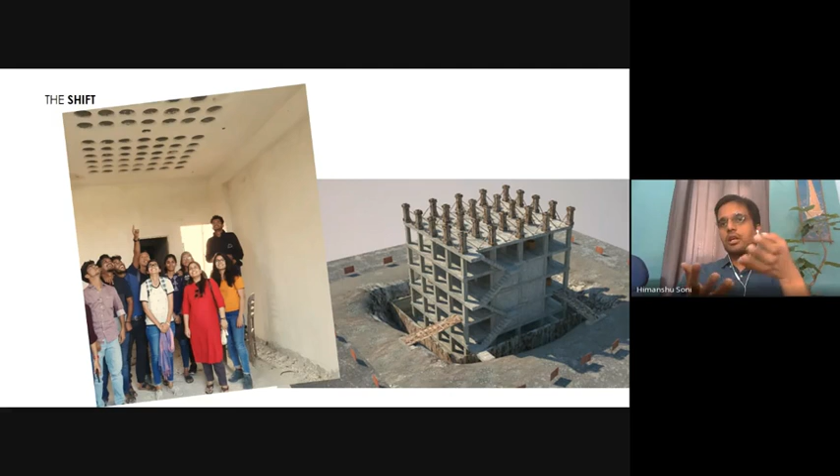From site visits, taking students to the site, now the faculty might have to shift to creating videos of the site, or use multimedia tools or virtual models of the sites. The exact construction, how it is happening, can be done in virtual reality and presented to the students so they have an almost near to real experience. Obviously we cannot replace the experiential learning part, but at least we could say they are industry ready, and when they go to the site, they are not in a situation of shock or awe, where what they are seeing and what they have learned is a completely different thing.

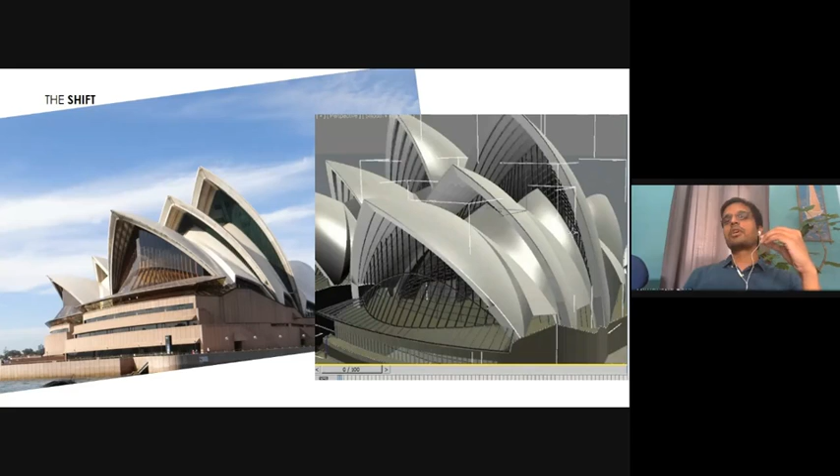Visiting your local or international iconic buildings can now be experienced through various tools, like using Google Maps to virtually do street tours. Similarly, there are various 3D modeling softwares that have created exact replicas of models, and you can see each and every minute detail of these masterpieces to understand how they were created and what would have gone into the construction phases. So there are lots of resources now being created and delivered for pedagogical purposes, but for this we need to understand the tools very well.

Most of the time, only 10% or 5% of the students or trainees we interact with are good, but 90%, 85% of them have a very superficial knowledge of the concerned technology they are working on, because of the short attention span they are fighting with, and lots of information coming to them. So we really need to upgrade ourselves to upgrade them also. We cannot take for granted that we deliver the knowledge and the technology will be taken care of by the students themselves. Both things have to happen in parallel.

Another thing that comes up in my interactions with colleagues, and most people while I was at CEPT, or even now, is that imagination and virtual reality are seen as against each other, like black and white statements—either they are against each other because virtual reality will eventually kill the imagination power of an individual, or, as someone pointed out, basic concepts are very important to understand, which is rightly what I'm trying to tell. The second part is we believe that if you don't use your faculty of imagination, eventually it will go off. But there is a lot of gray area.

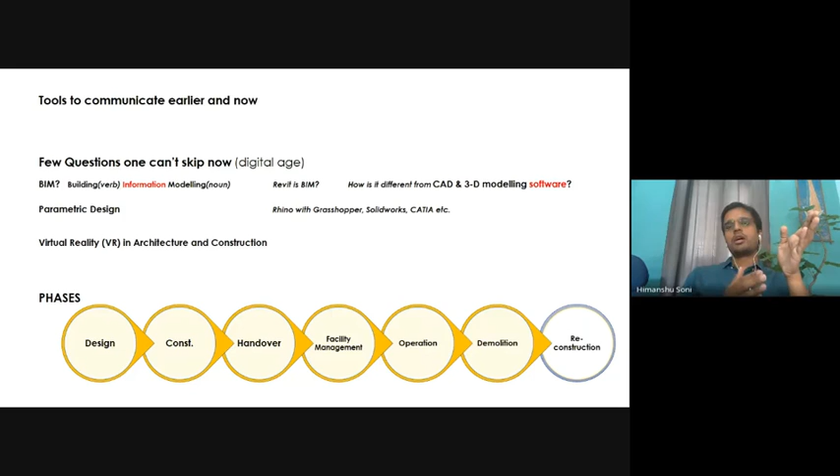If you look into the past, we were majorly concerned about design and construction phases of the building, and we would take feedback over a period of time. But now with larger scale projects, and when we have technologies like BIM, we can do this complete building phasing, and you can have control over it as a project manager.

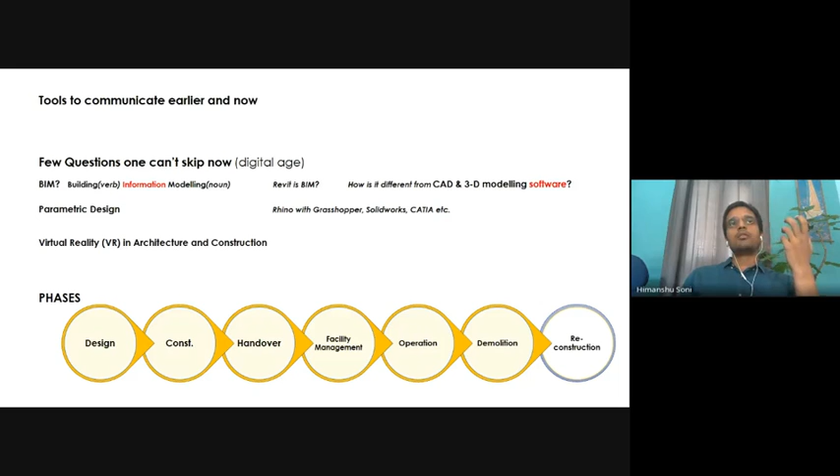So you can talk about design, you can have construction, then when you hand over, you have certain manuals - what are the various drawings, where are the shaft locations, what maintenance practices you have to follow later. And the operations part, how you can take care of it from demolition to again if you have to reconstruct the building. So this is the kind of information which is now being created, used, and transformed.

I think I'll go to the next slide now. So another thing - I attended Sanjay Prakash sir's session for a very short while, and I think he also mentioned this. Mostly we have to stop thinking of architects, while making our students architects, and also as practicing architects, we have to stop considering ourselves as the captain of the ship anymore. There are lots of stakeholders, and they need to be brought together, given a proper place in the whole practice.

We need to collaborate to create these information models we are talking about, so that you can have fewer surprises when the work goes onto the site. There are fewer errors, and the cost that goes into creating these things is eventually recovered, because you save a lot of cost from recurring expenses caused by errors done at site.

So this term is basically called your pre-construction management. You create almost everything in a model virtually as if it is going to get constructed step by step in a phased manner. This reduces the need of physical meetings on site, resolves issues, and makes the process smooth and efficient.

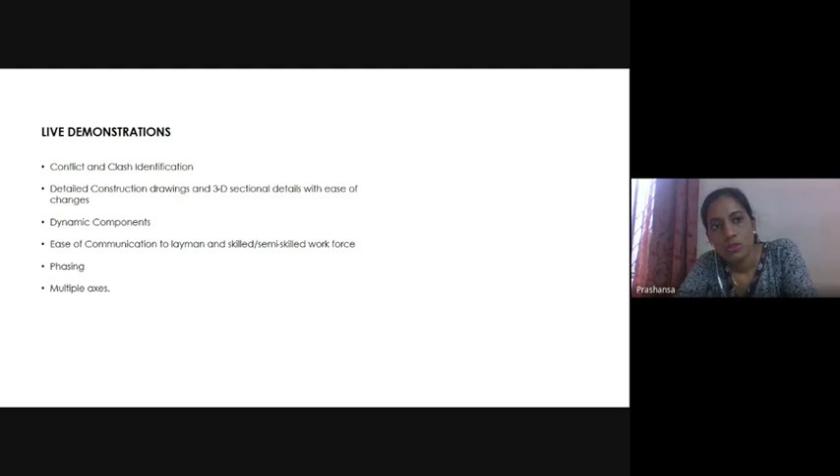No, that's it. So we are now moving towards the live demonstration by Himanshu. Himanshu, are we ready? Yeah, we are ready, I think now I will have to start.

What we are going into for the live demonstration, as Prashansa rightly pointed out, we're going to talk about just one tool. I would always say you have to fall in love with technology to understand it deeply and use it. Somebody was asking if it makes the whole process cumbersome to go forth with your imagination and create a 3D model. When you actually fall in love with technology and start using tools with perfection, it becomes like your hand - you're using your hand, in a similar manner.

So I have picked up a tool for you guys to experiment with, which can help you in your pedagogic ventures: SketchUp. Why I have picked it up is because a first year student can also understand it, work it, access it. It is a very easy tool on its first impression. My 10-year-old nephew also uses SketchUp to create a pool, or whatever is his imagination. So it's that easy a tool on the face of it.

But it is a very complex tool when you start getting into it to express things. You can take out your quantities also, as Prashansa was telling, there are BIM features also coming. Initially it was with Google, then it came to Trimble, and now Trimble is trying to make it into a complete BIM platform, parallelly, along with the ease of its functioning. SketchUp is much more user friendly - it's much easier to pick up than Revit, which has a lot of demands from the hardware part, like you need a lot of RAM in your PCs and all.

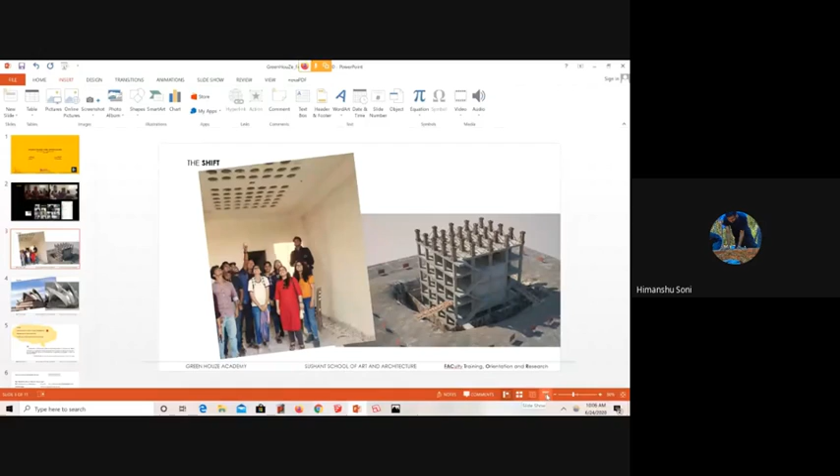Okay, so this is the live demonstration in which we are going to talk about conflict and clash identification. That's a bit complicated, so I'll keep it for the last if time permits. We'll also look into detailed construction drawings and 3D sectional details which can be created and easily changed in SketchUp.

SketchUp, which is generally considered a very basic tool, has got a very advanced level of understanding, and I think there have been a few things shared in the previous presentation also. There are dynamic components which can be interacted with. So these are the list of things, I'll go one by one.

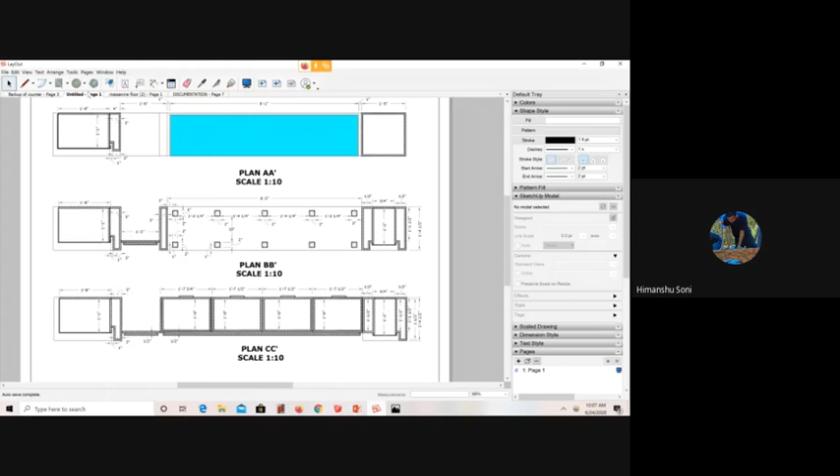Let's say I'll go further for construction purposes. Let's say you are talking about a door detail. This is the kind of detail which we can use. This is always connected to your model. So let's say this is your door. I will go to SketchUp now.

So I will start with the live practice also. First, I will demonstrate a few things. Let's say this is your door, and I have to change something in this. Let's say I delete these handles in it.

So what happens in your layout? I have to save it also. The moment you change something in your model, you save it, go to your layout tab back again, and update the model. Right click.

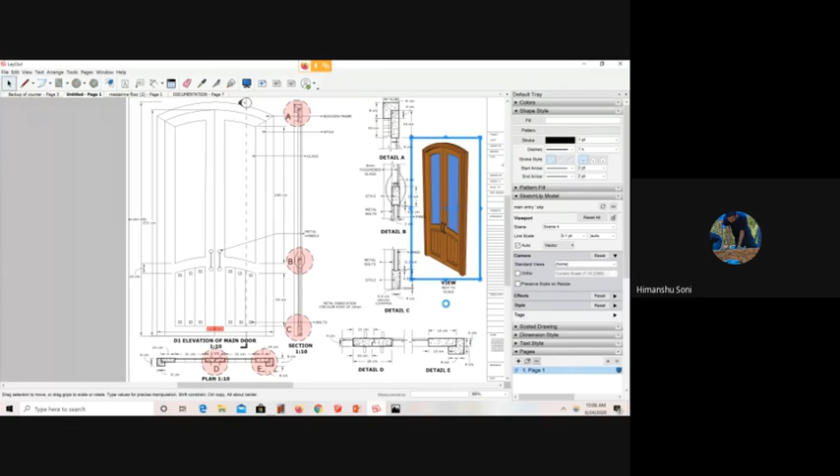Okay, so you have to update the model reference from here. Right clicking it, update the model reference. And the moment you do it, you see things change everywhere.

So it will take some time. See, once your handles are gone, it is gone from here, and there is a red mark which is created, which says that there is something marked in the drawing which is not there. There was a handle over here also which is removed. In the plan also, in the front areas, there was a handle which is automatically removed. So you work actually in 3D, and your 2D stuff, which you have created with the knowledge that is being delivered to your students, gets updated automatically.

So a lot of recurring or a lot of checking is actually reduced. You do it at one place, and if you have certain labeling which is there, that is highlighted in red, and you can rectify it along with it. So this is the kind of thing which you can get.

So I think I'll close this. Other details which I want to show you are possible. This is the kind of staircase detail also which can be created. So you do modeling on SketchUp, bring it to layout with various views, and you can combine and do the level of detailing.

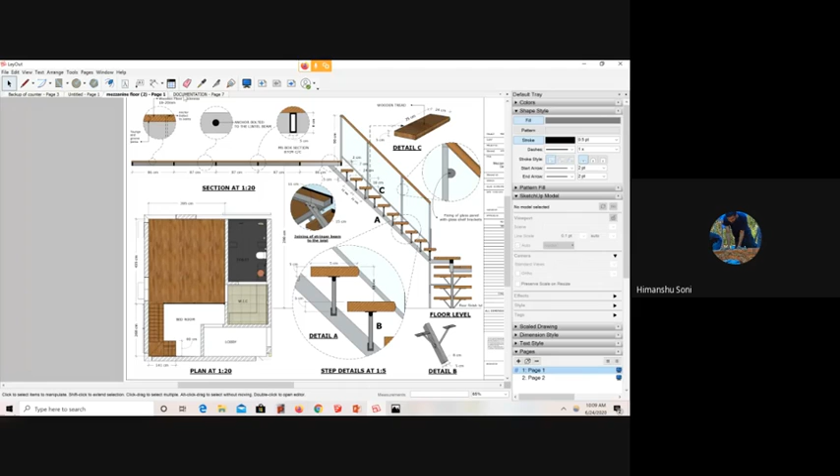So the basic conception of SketchUp being a very basic tool can be broken by seeing these images, or you can also do these kinds of drawings. This is also, I'll just bring it a bit up. So this is the kind of drawings which you can produce out of SketchUp. The level of detail is almost similar to what you do through your hand drawings or through your AutoCAD drawings.

So there are lots of... see, this is the kind of... you can create exploded views also out of it.

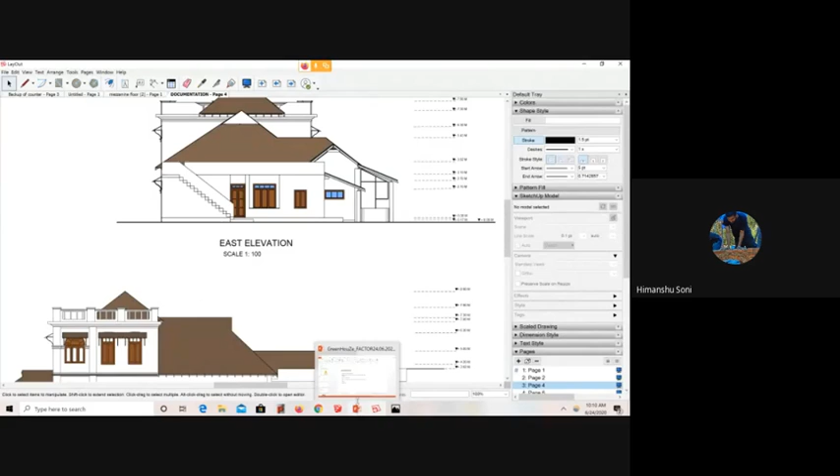These are the kind of sectional drawings you can create, along with elevation. I think that's sufficient for the level of drawings we can achieve. I'm just trying to make you fall in love with the software a bit, so that when you start practicing, you actually see the meaning in it.

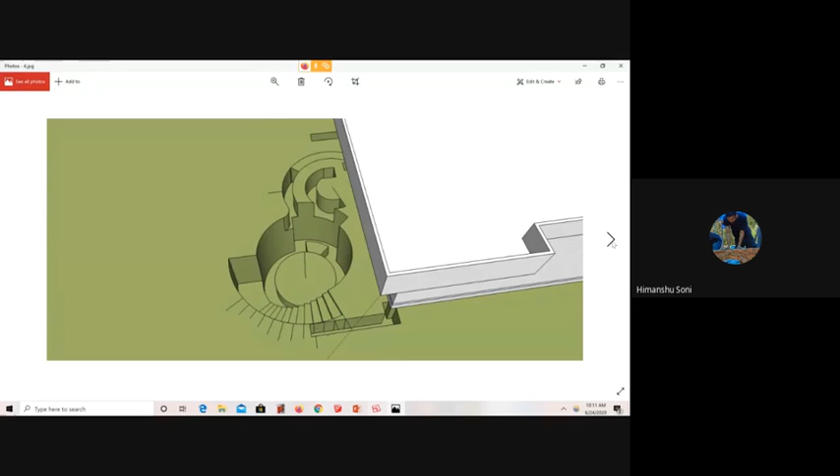Another thing you can do is various phasing in construction. I'll show you one of our projects in Udaipur, which was mud and stone construction, a multi-level project. We needed to pass on information to the site, so we created various phasing of it - showing how the foundation has to be dug, how the staircase has to be taken out, and what are the other levels. This was very difficult for me to communicate because there were so many levels to the semi-skilled people working on site, and this really helped - they could carry it on their mobile and refer to it more and more.

There were dimensional drawings provided along with these things. You can take them to the layout tab and create dimensional drawings out of it, and create various phases - like the stone foundation, then the PCC which is being done, then the stone foundation coming up, cement oxide flooring coming, stone walls coming up, CSEB blocks coming up. This is the kind of help you can generate out of SketchUp to explain to your students, or also for communicating.

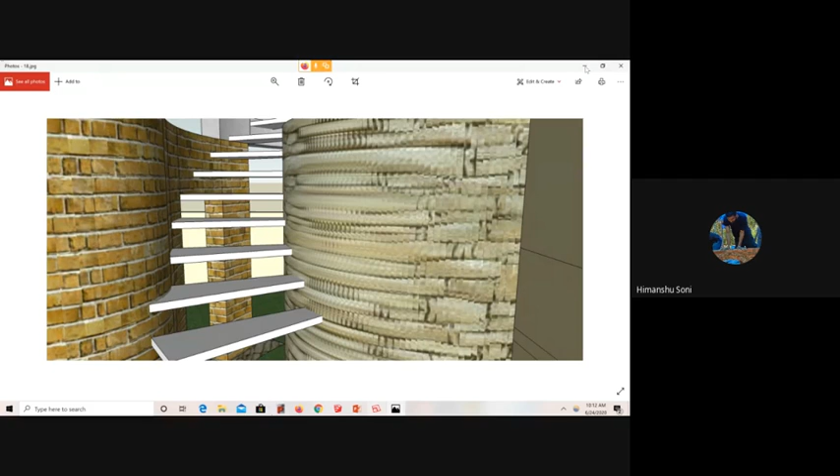Basically, how powerful a tool is in communicating something becomes important. I have got another model which helps you to dynamically tell - this is the final model. This was created by John.

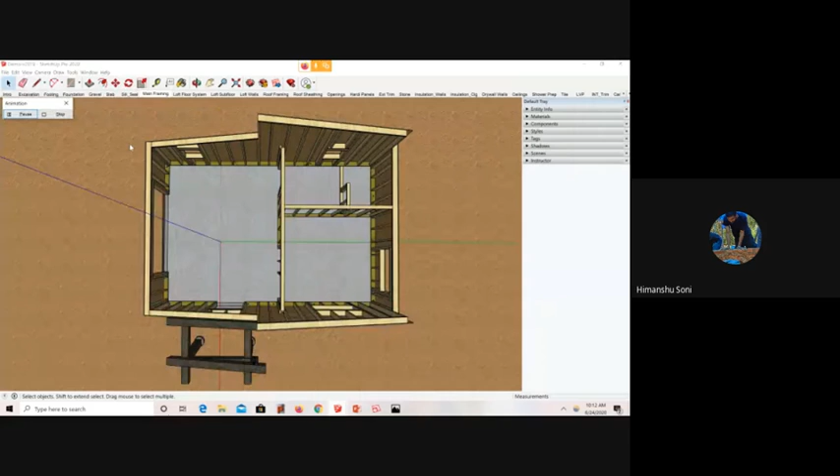If you look into, I have various tabs on top. SketchUp has a tool called Scenes, which you keep adding to create animation - from excavation to footing to foundation, and these can all be attached to attributes to get quantities out of it. So there's gravel, then you put a slab on it. I can also run an animation of it - let's say I go and play animation, so you slowly see how things are building up on site. This could help the client understand how things would happen, and also help you communicate to the construction team. The communication becomes very clear, and the chances of error start reducing.

So your stone cladding comes to the bottom, and then your inner insulation boards start happening - this is a wooden construction. Then the toilet fixtures. These are the kind of phasing you can do.

Himanshu, what is this phasing tool? What are the commands? Yeah, I'll tell you that - I'm just showing the power of the whole platform. This is the Scenes tool, which is used to create these kinds of phasing.

You switch on and switch off layers, and try to control what is visible and what is not. To create this, you create a model, then put it into various layers as you do in AutoCAD, and then switch from one scene to another to create these kinds of animation. I'll demonstrate that also.

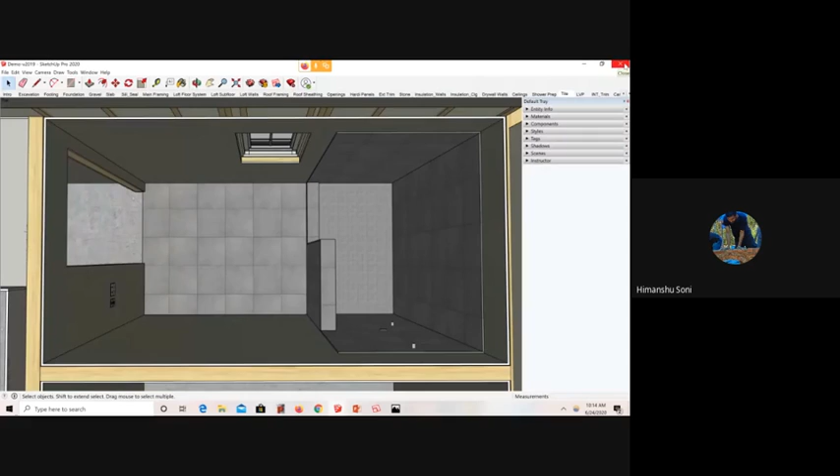Okay, I'll just make the whole system a bit lighter. Now we move on, as we were having discussion with Prasansa, so we'll start with understanding the whole SketchUp tool. This would be helpful for beginners, as well as for people who are already using SketchUp. I use SketchUp very intuitively - I see the toolbox and I start using it.

First of all, I'd like all you guys to open up SketchUp and do one small thing. You'll see a toolbar on top of your window. Go to View, and in the view go to Toolbars. In the toolbar, click on the large tool set, uncheck getting started, and close it. You'll get this toolbar onto your left panel. Keep the default tray also open - there you have entity info, materials, and a lot of things which you need to use while you work. I hope everybody is with me.

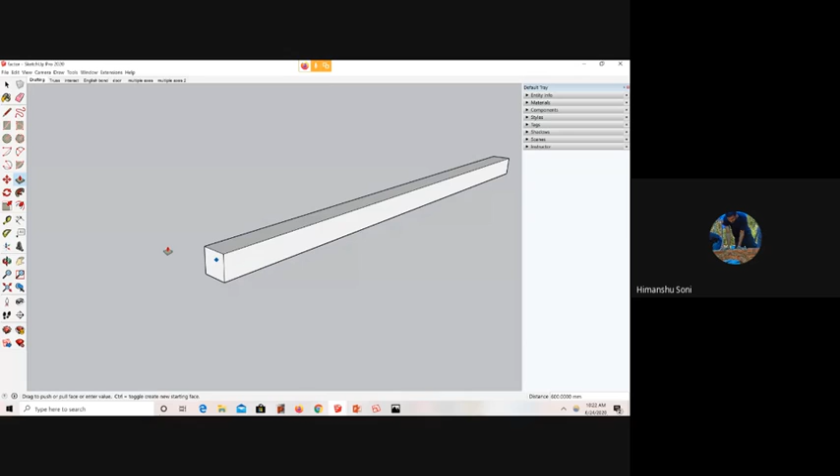So let's say I created this, and now I want to rotate it to 45 degrees. For rotating, you can use the same arrow keys, rotating it along the green axis.

So you lock it along the green axis, keep it, and give it a dimension of 45 degrees. So this happens. Now there is another tool of SketchUp which is very helpful.

That tool is creating components and groups. So what is the difference between components and groups? Group we always use in PPT also to group things. So there are a lot of surfaces in this. If you select, you will select one surface, you can select another surface. So SketchUp as a tool works on surfaces.

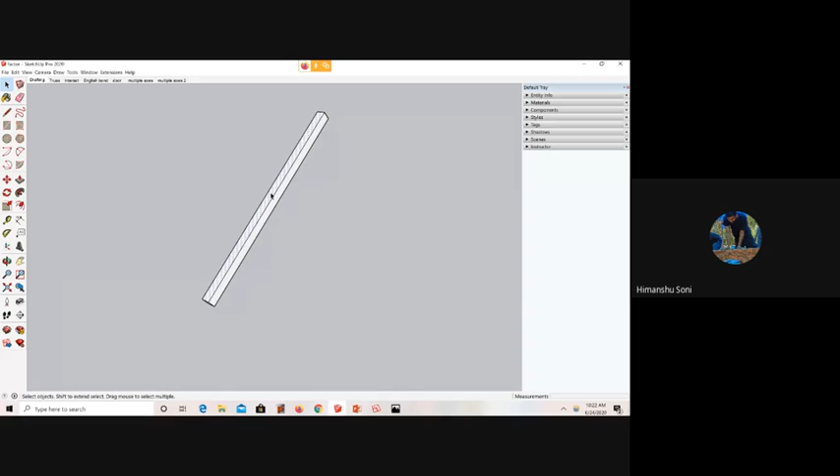You double click, double click and triple click it, you will get the complete thing selected. And you can right click and make a component out of it. So component gives you a very powerful tool.

If you make changes in one component, whatever times you repeat it, it will change in the other instances also. So let's say you make a column and you change the size of the column at one place, it will change in the rest of the places.

So we'll make this truss member as a component. You create a component, give it a name, truss member, and you say create. So you have done with this.

And now what you can do, you have to copy this thing. So the move command comes in handy. This is a move command. You can press M also, and it is also used for copy also.

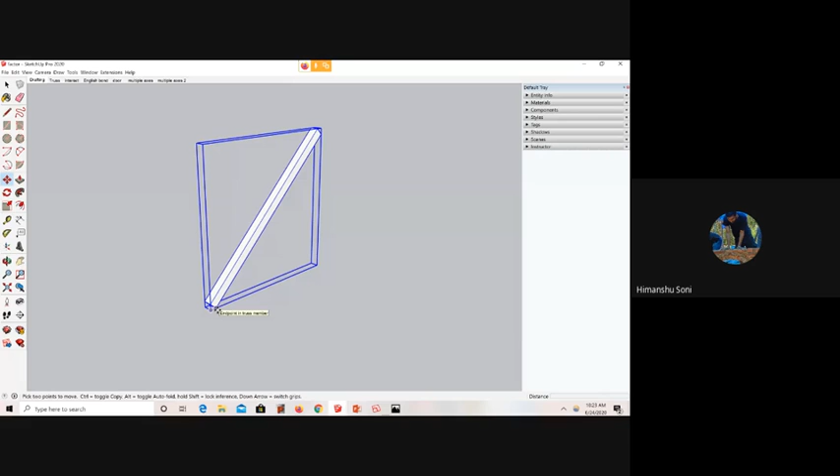So you select the origin point from where you want to copy and press Control. The moment you press Control, it automatically creates a copy of it. So this is how it creates a copy, and now I have to create a mirror of it.

So you can use the flip command also, flip along. If you know if the thing is in green, red, or blue axis, you can use that. So you can flip it like that, or you can use the scale command.

So for a scale command to create a mirror, you have to pick the central point and you have to go into the other direction, giving it -1. So you get an exact result.

So when you do this scale command, you see your scale is changing. In the bottom where you were putting the dimensions, for getting the exact result, you can just put -1 and you will get the mirror image.

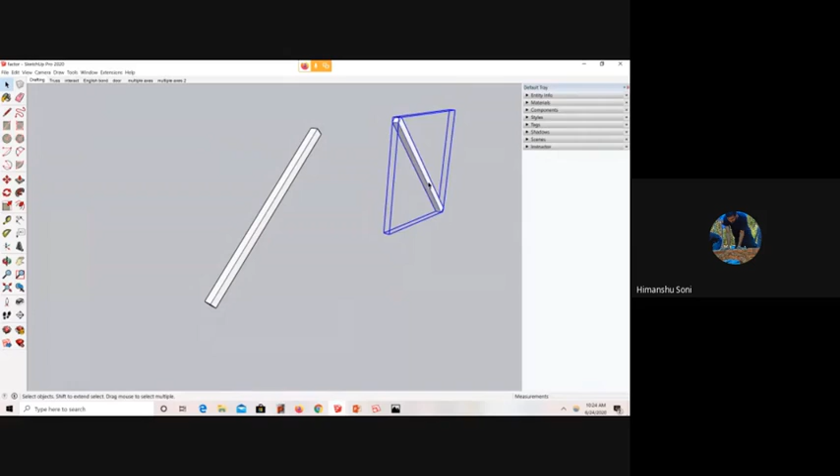Now you can select and move it from a point where you want to paste it. So I would like to take it here and paste it here. Now, so this is there.

Now you can copy multiple instances of this by pressing Control, you can select both the objects. So let's say you select one, then press Control. This gets added to it, and then again you give the same move command, M enter, and with Control it starts shifting. So you create another instance of it.

Okay, and you move it, and you paste it to the desired location you want. So this creates your truss member.

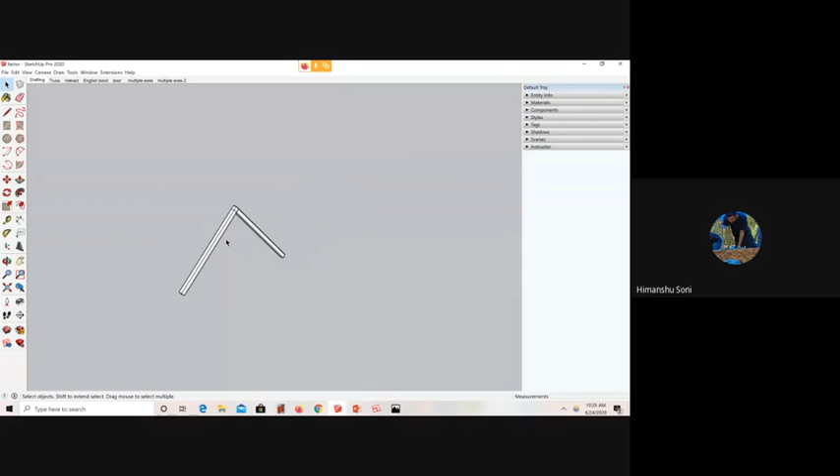If you have a longer truss, what you can simply do, you can move. Let's say I have created this move command and placed it here. I will delete it and show you how the array command works. So let's say I select this, and I press move.

I click onto this icon and I say Control and I shift it and place it here. So this is your exact position at a distance which you want to move it. And when you want 5 such elements, you can say 5x. Type 5 and then type x and click, and there are 5 instances of it which are automatically created.

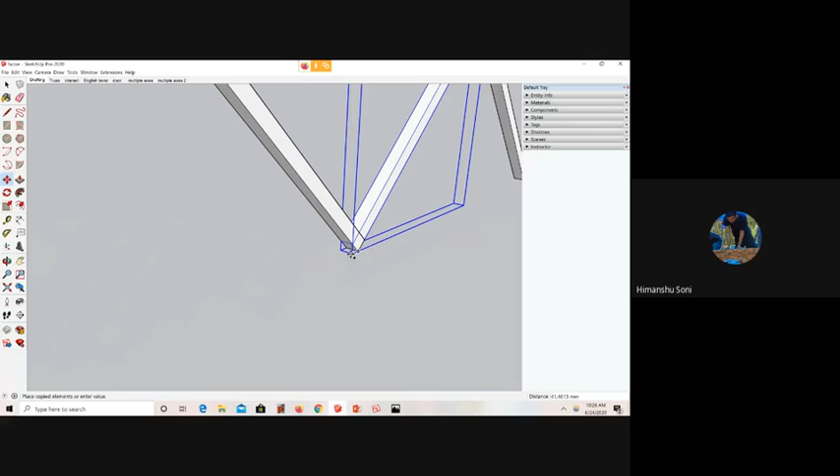So this speeds up your work. You can create these kinds of things very quickly, and then you need to have, let's say, one more member at the end. So I will do again move, press Control, and paste it here. So you have that basic in-between member of trusses ready.

Now let's say I want to make it a bit smaller, for you to see it in the zoomed in screen. Okay, so let's say this is the size of your truss. You can use the hand tool, H enter, to pan while you're working, and the scroll tool to zoom in and zoom out.

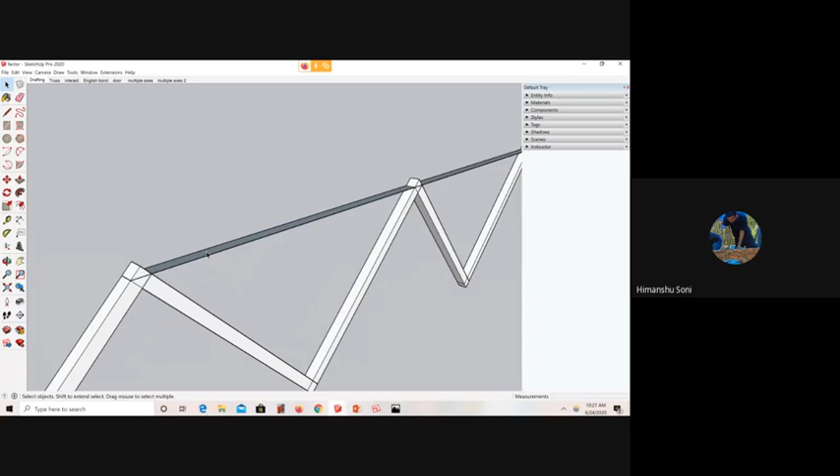So I again pick the set tool and select and create the top member of it. Okay, so let's say this is the top. It automatically snaps. The SketchUp tool is very easy to use because there is a lot of snapping which automatically happens. So this is your top member, let's say, and create again a component of it, top member component, and create it.

Now you push it to create another, again 25 mm, you want the same dimension for it. I think we have to be a little slow here.

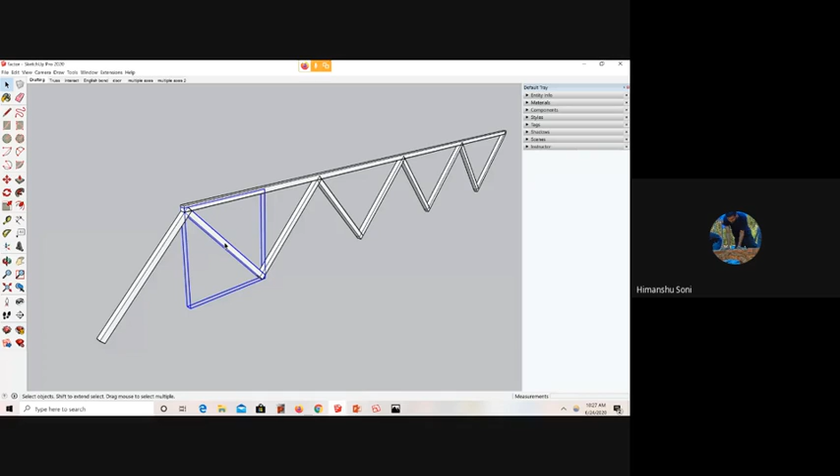So while we are working inside a component, only that portion will be seen, and we can do all the editing within that. So I will just demonstrate that also. If this is the component and I have to do editing, I will do that because I will make this truss from wooden to steel.

So in that I will demonstrate how you can change the components also. So this is your component and this behaves as one. Now you can move it and place it, let's say you bring it down and you place it.

Okay, I'll use the tool which is, see this is the tool you can use to shift it in the same axis. You want to bring it and press the control tool to make a copy out of it. So like we were doing, once you have this, you can move it to the desired location.

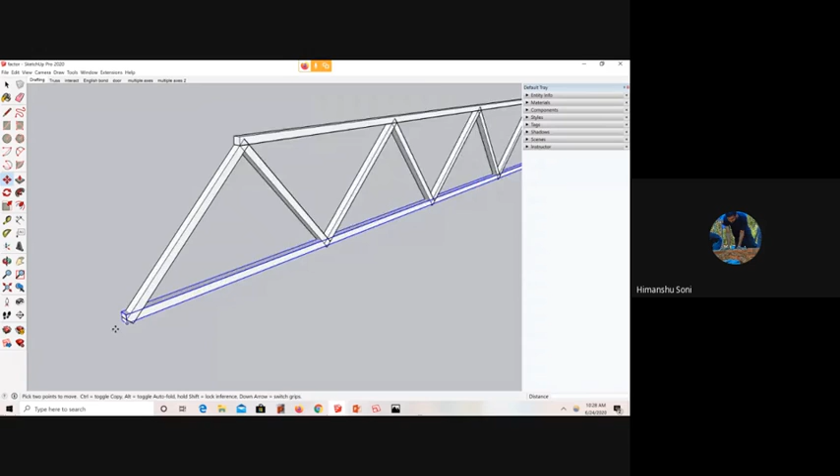So this truss is ready for you, and now you can put the plate details and everything. So what other tools I want you to know before, so that you understand the software and you can communicate. The array tool, so it's a request from a participant, so we have to repeat the array tool.

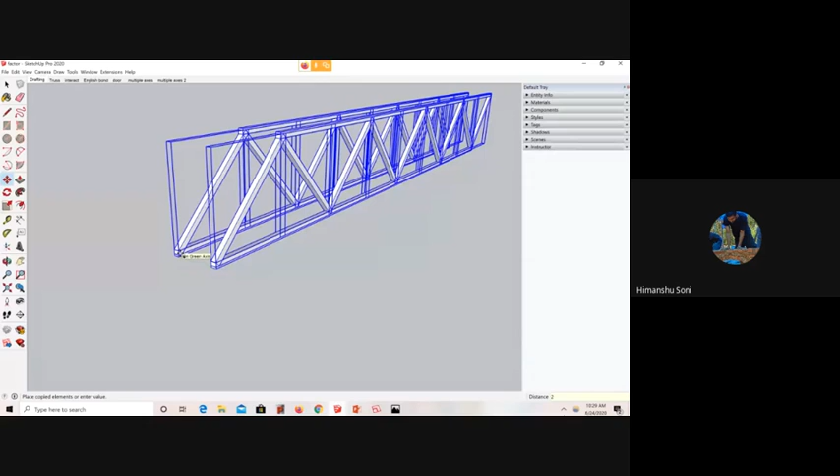Very good. So what you will do, if these are your components, let's say I selected all and I want to array it. So I just say move, and I want to place these trusses at a distance of 2.5 meter. I press control and a copy of the instance is made, and I say 2.5 meter. You have placed your truss at 2.5 meter distance.

Now I want 5 instances of this. So I just press 5, press X, and press enter. So you have the trusses equally distributed between these distances. This is the power of the array command. This can be a circular or polar array also, which you can use.

But before going to that, I would like to use, because in your architectural purposes, you generally divide a span. You don't generally multiply in a span most of the time. So for this purpose, let's say I select this truss again, and just delete all the other instances.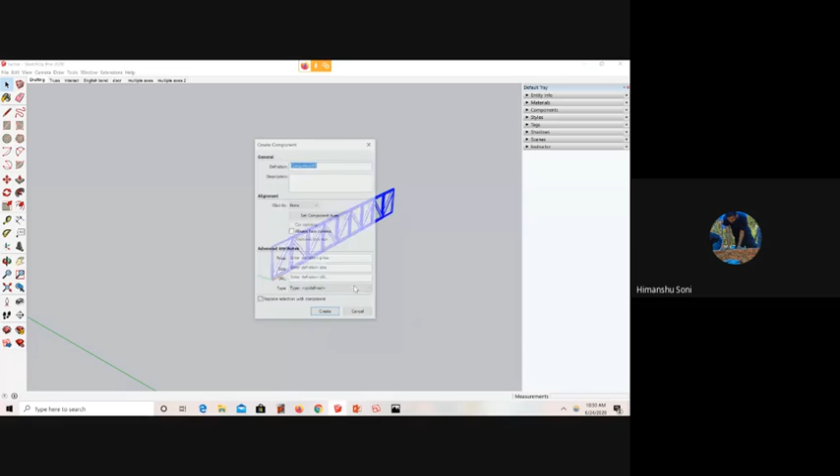Okay, so I will make a component of it again, so that will make the working easy. So when I select, it gets selected altogether.

Okay, so let's say I have to divide or put 6 trusses within a 10 meter span. So I shift it again and put it at 10 meter distance. So now I know the span, the total span is 10 meter. I need 6 trusses between them.

So what I will do, like I was doing 5x, now I will do the divide button, slash button, and do 6 trusses. When I do this, they are equally divided and placed in your model. So this is the kind of structural exercise which you can also do in your SketchUp model very easily.

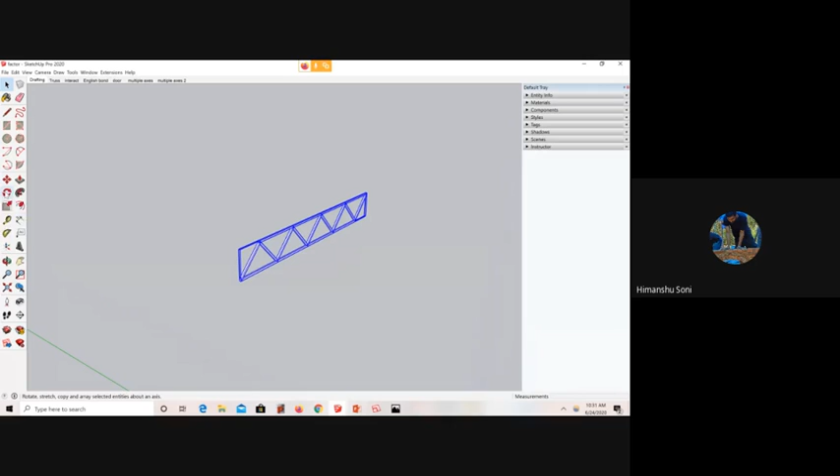Similarly, you can use this for your polar array also. For that you need to use this rotate command, which is below the move command. You click on that icon, lock onto one of the axes, and let's say I want to rotate it.

Press control again to copy the instance. I say I want to rotate it by 45 degrees. I press 45 degree and I say 7 of such trusses I want. So I would say 7x, and I have a beautiful structure created out of trusses, that polar array.

So while rotating, it's very important to lock one axis on which the rotation angle is calculated from. So once, can you demonstrate it clearly, how to lock the first axis and then start rotating?

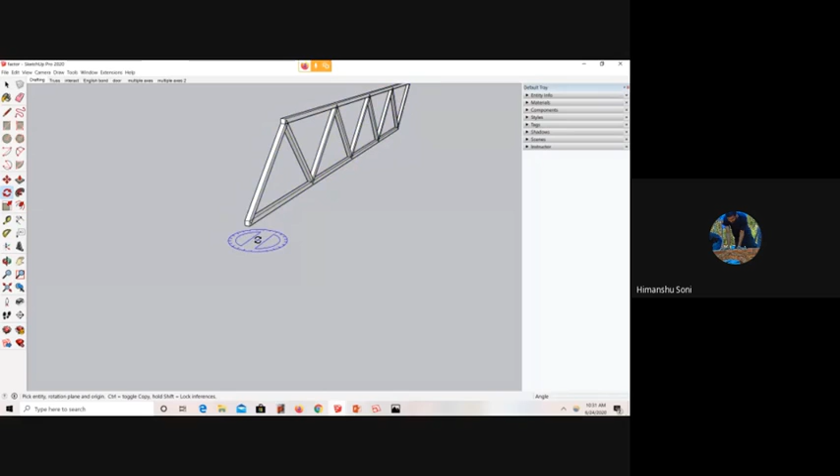Yeah, so what happens is the arrow keys become very important for you. If I have to rotate along the blue axis, I will just push the up key and it gets there. If I have to rotate along the green axis, I will push the left key. If I have to push along the red axis, I will push the right key.

And there's a very good option which people using SketchUp might also not know, the down key. What this down key does is align your axis to surfaces which are different from, let's say, it is not aligning right now. You press it like this and your surface gets locked to the inclined surfaces also if you want to rotate.

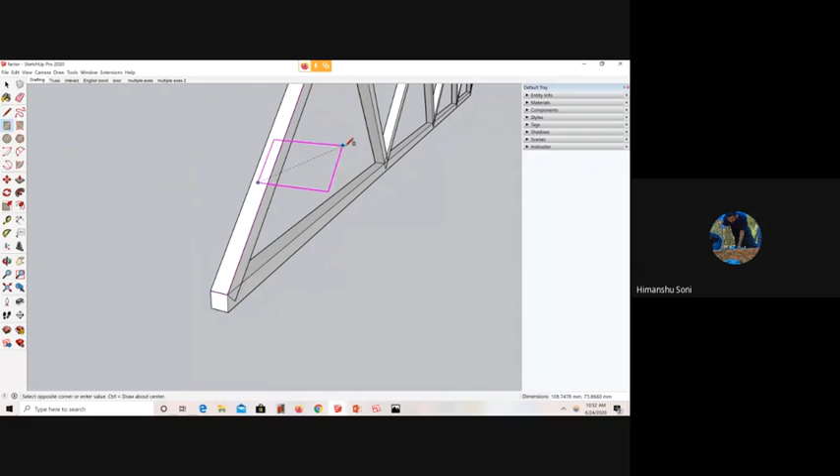Similar thing happens for making a square also. You can make a square by pressing the up key for the blue axis, left key for the green axis, right key for the red axis. When you press the down key, you can make squares parallel to this axis also. That is the functionality of the SketchUp tool - these are all native features.

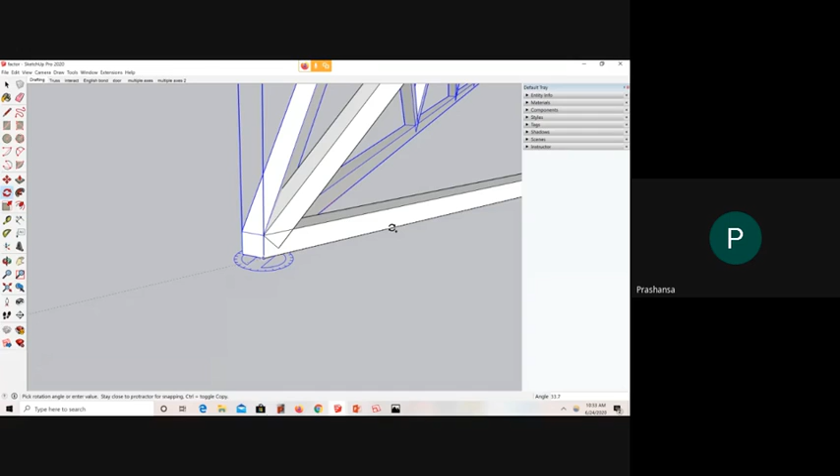Now coming back to rotation, what Prashansa pointed out. This is your blue axis and you lock it by pressing the up key, then press at the corner where you want to rotate, move along the axis on which you want, and start rotating with control. On the compass, I've first chosen the 0 and then started rotating from the point where you want to rotate.

This is what we do in AutoCAD also. So you put a 45 degree angle, press enter, and you have this instance. Now you want it 7 times, and your trusses are created. Similarly, you can divide in this polar array also, like we did in the normal array function - you can divide it between 360 degrees. So this is how we can do it.

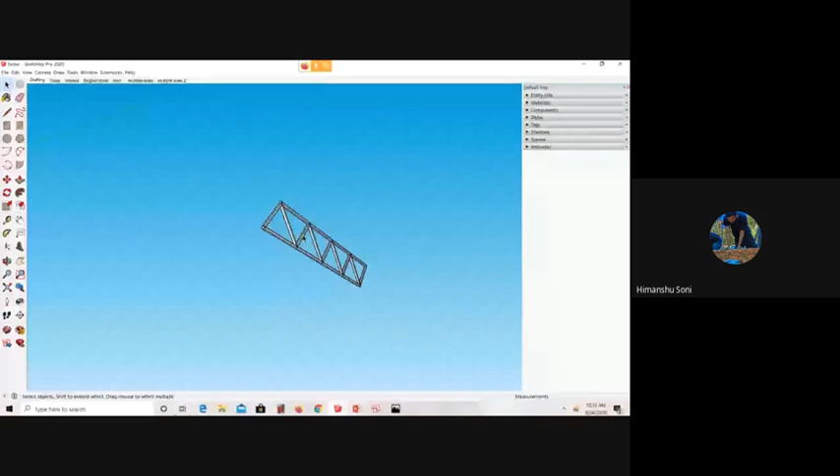Now coming more ahead, I think dimensions I have done, array commands are done. So you might need certain different kinds of sections to be used, let's say.

This is your polygonal tool, and when you create this polygon, there is a very important function. You select its outline and go to the entity info in your default tray. There you have these segments - if you click 3, it becomes a triangle, if you say 4, it becomes a square, if you say 8, it becomes an octagon.

So you can control the geometry you want, the regular geometries. Irregular geometries you have to create on your own. So that is this tool which I want you to know for your purposes - entity info is a very good tool to use.

Now let's say I have to simply make this from wood to SS. So I double click and go inside the model, into this component, and I move, press the Control key, and copy it to edit it.

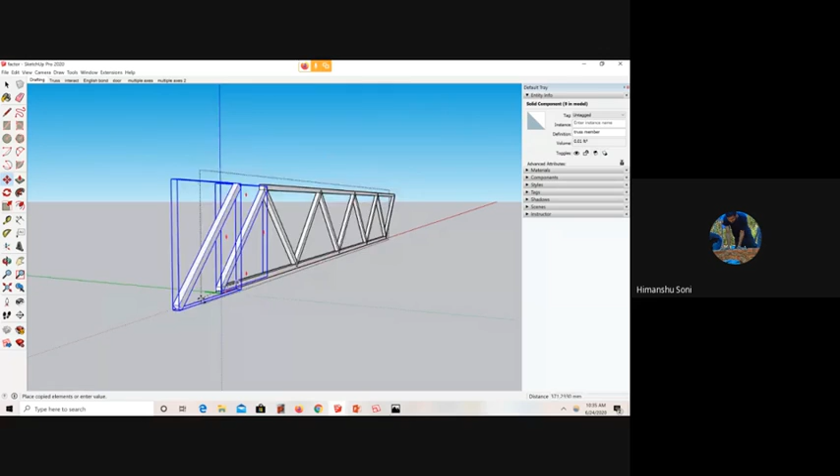Let's say I go to the base to change its shape - go inside the component, double click it. You have to double click into the component to actually go inside and start editing it. I'll show you a small demonstration - I am changing this, and you can see all the other components are also changing along with it.

So what I will do simply is make it a square into a circular section out of it to make it a pipe truss. Let's say I select and create, let's say I want a 12.5 mm radius circle. I create this.

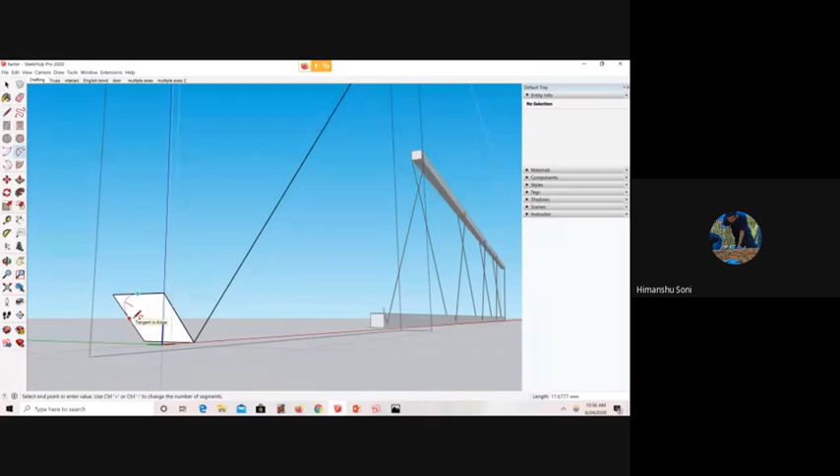Or you can alternately do one thing also, which is very interesting - the double click command of SketchUp, very helpful at times. If you remove these surfaces and go to this arc command, pick its center, pick another center and double click, it automatically trims it. Otherwise you have to draw and delete it, but with this you just double click and it happens. This is also another very good tool you can make use of.

So I'll go back to what we were doing - we create and draw a circle. This is a circle which is created. I delete everything else, and leave one line pending so that you know the exact dimension for which you want this circle to go, then delete everything else.

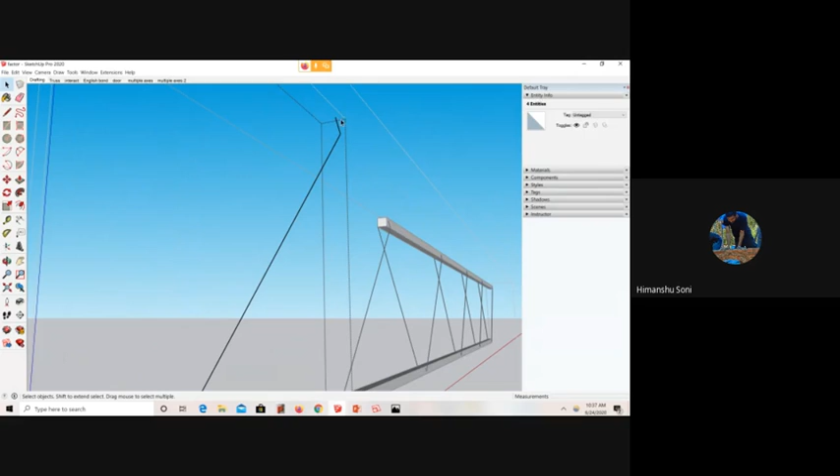Then there is this follow me command, and most people who use SketchUp use it wrongly. What they do is select the surface, select the follow me command, select the surface and try to go along the path, and at times they are not able to do it properly. So what you have to do - this is a small hack to it.

You just select the path you want first, then go to the follow me command and select the surface - you don't have to do anything, it is automatically done for you. It becomes that easy. Similarly, you can change the above section also. That was a bit lengthy method, just to tell you various tools of SketchUp and make you understand them - that's why I did this method.

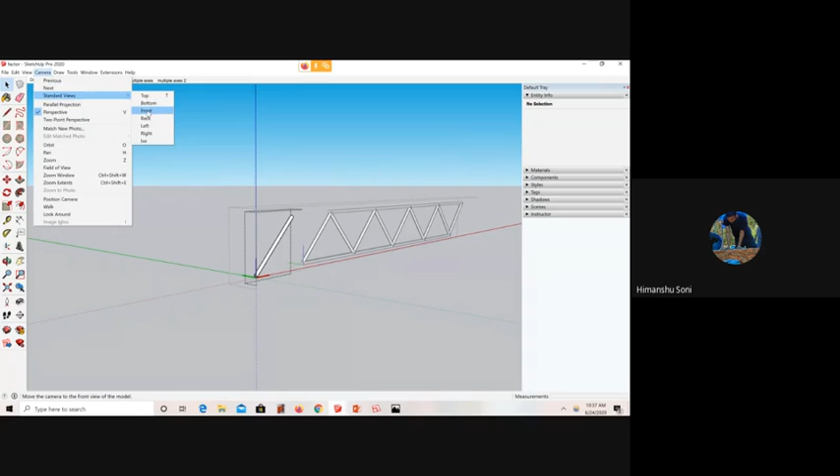There is an easier method also to create a truss. I will go to the standard view, to the front or left view. The V command is used to switch between perspective and parallel projections in SketchUp, or you can do it from the camera menu, switching between parallel projection and perspective. So I will switch to parallel projections, go to standard views, and select front. This is my front elevation.

Let's say I will recreate this. I go to the line command and create a 600 mm line, then rotate it. I lock it onto the green axis, select the point, and set it at 45 degrees. Then I use the line command to create a parallel line by pressing down, and I copy it with control and flip it along.

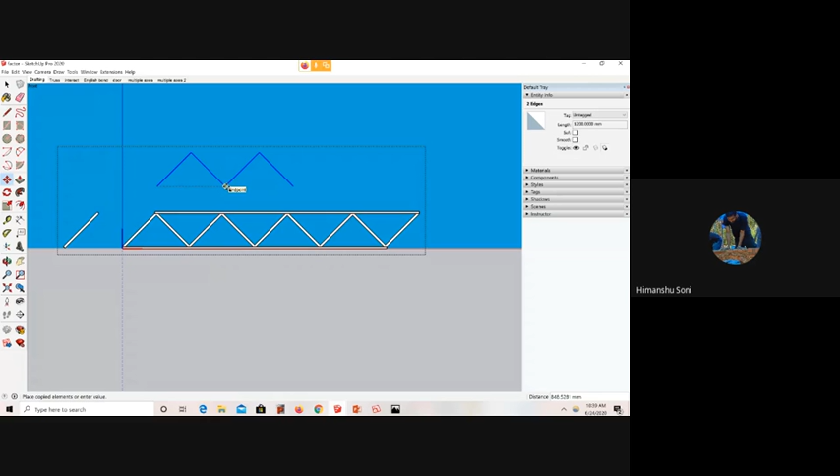Okay, this will only work for components. So I will create another line. SketchUp automatically helps you snap at the 45 degree or 90 degree axis. You create this line and another line of 600 mm, and let's say I want to array it. I move, press the control key, and say I want 3 instances of it, so 3x. This is my created truss member in between.

I now go and make a circle, let's say 12.5 mm diameter, and now you have to smartly use the follow me command. You select the path, this is your path, select it, press follow me, and click onto the circle.

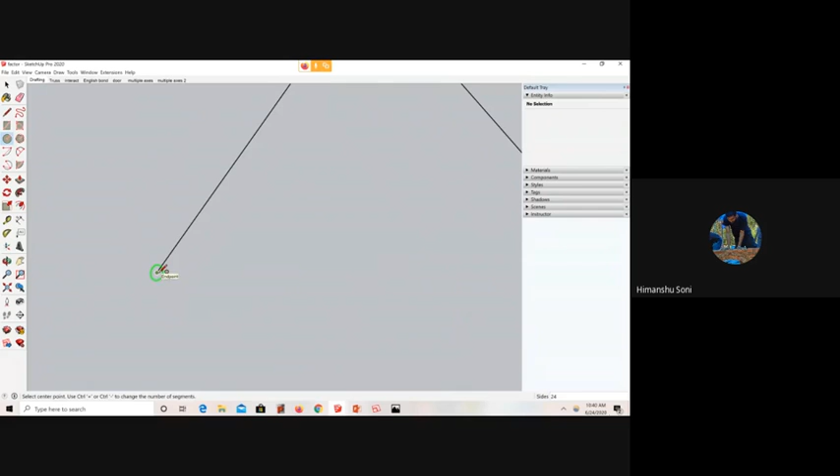There's something wrong, I think the circle axis is wrong. So you delete it. Go to the circle command, use the arrow keys, and create a circle along the red axis, or simply create it onto the base. I press the up key to lock it, and create a circle of, let's say, 12.5 mm.

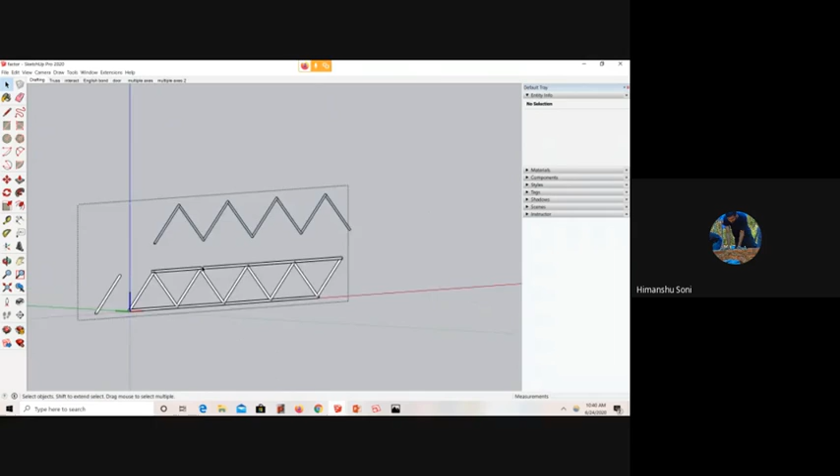So this is done, and now I can select my path as I told you earlier, and go and click the follow me command to the surface which I want. See, automatically your truss is generated. Then you can create the top members and the bottom members. This is another very interesting tool you can use.

This can also be used for creating door frames. I have already made an instance ready for you for the door frame. So let's say I want to create a door frame out of it. I will select the path, which is 3 feet by 7 feet, my door frame, and go to the follow me command. You can use various sections, whatever you want, hollow sections. You can tell students this is an aluminium section, this is a wooden section, and you create your door frame in just one click.

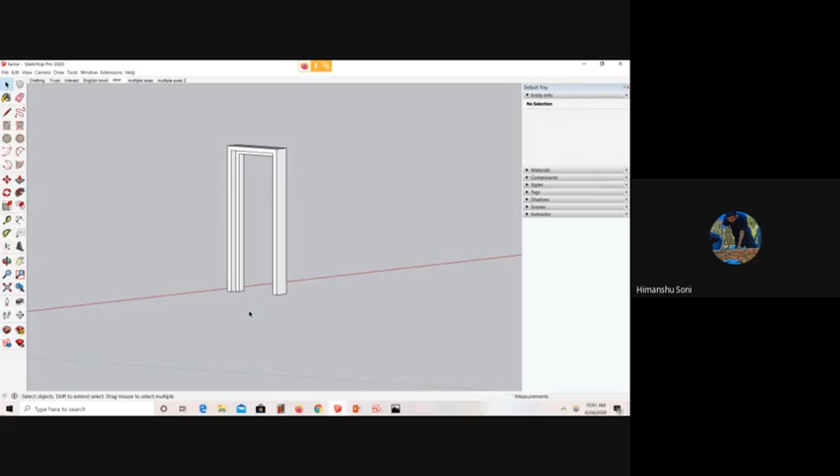These are very fast tools. So you start seeing that it is not very difficult to create things in your SketchUp model. I think this was truss building. I will show you certain detailed truss models also. This is the kind of detailed truss models which you can create. I'll just delete these trusses.

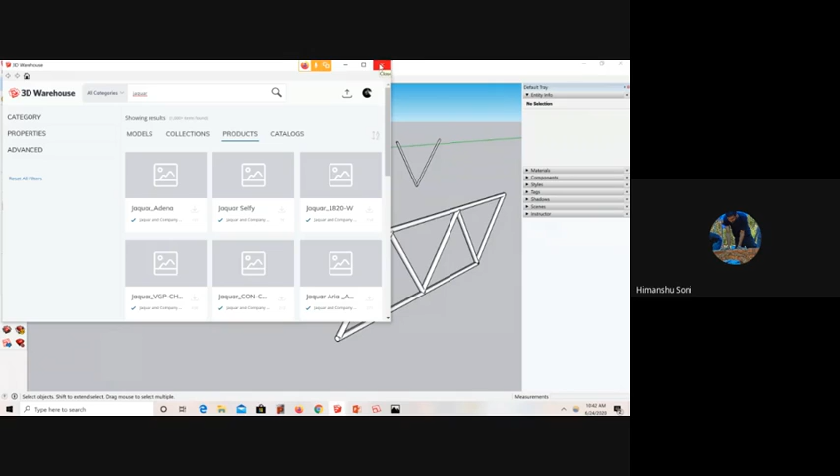When you give assignments to your students, you can cross-check whether it was created by them or taken from the 3D warehouse. SketchUp does have a 3D warehouse, so when you click it, you can download various models from here, of various brands and catalogs. We'll talk about that later if I get time.

So, this is a model which has been, let's say, to check whether the student created it on their own, you right click and go to 3D warehouse, and if you find the view details tab, then it was downloaded from the 3D components, where you can see who the author is and everything. If it's created on this software itself, you don't get this view details tab active, it's grayed out so you cannot check it.

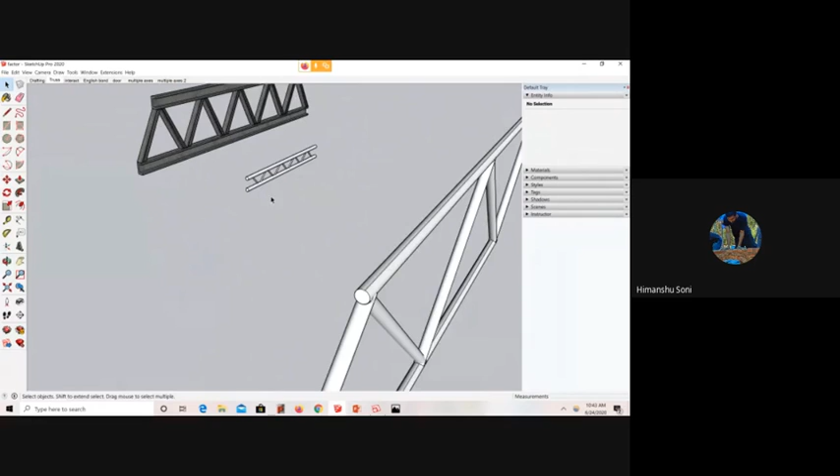Now I wanted to talk about dynamic components also. This component which I brought from the 3D warehouse is a dynamic component. When I right click, I go to dynamic component, people who are using it know it's a very powerful tool, and I go to component options. You don't have to draw or scale anything. I wanted 3 meters, it will automatically keep the divisions the same, and I say apply, so it becomes 3 meters.

I'll make it a bit larger for you to actually understand the difference, 5 meters.

And I say apply, and it becomes 5 meters. The divisions and everything remains the same.

So if you look into why I'm saying it has all gone into the parametric level, when you go into these dynamic tools - difficult to create, but when you go into the dynamic components and go to component attributes, there are lots of detailing functions correlated with length and material. There are various logarithmic functions you can build in, so there are lots of functions you can put into your dynamic component.

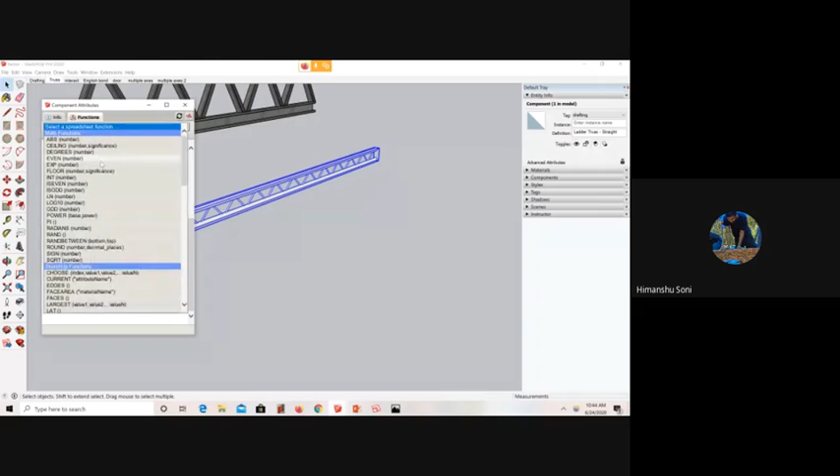I'll give you a very interesting example of a dynamic component. Where is the dynamic component? Interact. So this is a dynamic component for you to actually teach students, and this could be very helpful.

So let's say there is a thing called tools, and you go to window and go to interact. So this is interact in tools, and when your component is dynamic, you click it and the door gets opened. This could be an impressive way to present anything to your client, or a very good way to communicate and educate students using these dynamic components which interact while you are presenting. You can click it again and it gets closed. These are the kinds of tools which you can use.

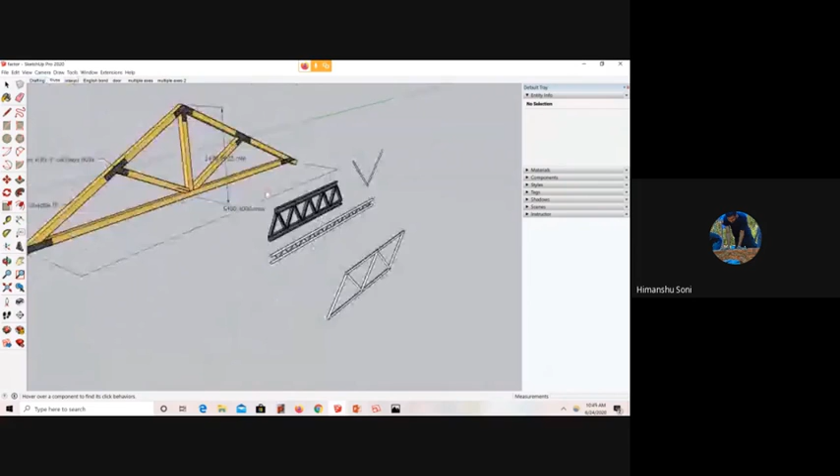Coming back to how I can make you learn a few more things so you can use SketchUp effectively. Let's say you get a component from 3D Warehouse and it is not aligned with the axis. So when you scale it or try to change anything using the scale command, it will scale in a very abrupt manner, and most users of SketchUp would have faced this problem. So what you have to do is simply click inside, get inside the component.

Use this axis command, which is next to the letter A, 3D text - there is an axis command. You click it and go to the axis you want the model to get aligned to. You press here, click here, and click here, then done. So now your model is aligned. When you go out, you use the escape key to escape from the component.

Okay, something went wrong - I was not inside the component, I think. I'll do it again.

See, this axis aligned and this axis aligned, and you're done. When I press the escape key, it asks: would you like to update the component axis to match the modified sketch axis? I say yes. Now I'm good to modify the model the way I want. See, it is not looking very abrupt now, and I can scale it to my benefit.

I think this is one tool which you can use.

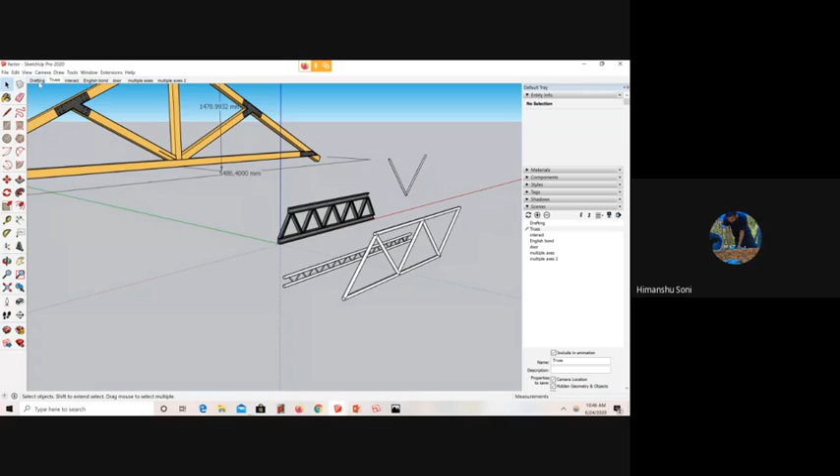Now coming back to, I think Aruna ma'am was asking about the scenes tab - this is a very powerful tab. What this does is I have created various scenes to talk about. So when I go into the drafting tab, I get a blank screen because I have switched off all the layers.

In 2020 it is called tags; if you're using an earlier version of SketchUp, it would be layers. So when I switch off all the other layers, I don't see other things in this.

When I switch from one - how do you do it? Let's say I have fixed my thing like this, and I want to create a scene with all the attributes of which layers I want on at this point, and the camera angles I want to switch on - you can see the various settings. Then I say add scene. The moment I say add scene, a new scene is created, and you can rename it accordingly. So that was for the scene which you have to create.

English bond - I will just quickly go through a very basic bond technique also, which you can use in your pedagogy. Focus, see.

Everybody can hear me? Yes, we can hear you. Somebody muted their microphones, so it was silence. We are purposely muting because otherwise there's some noise. For me it is like it is going on, the meeting is going on.

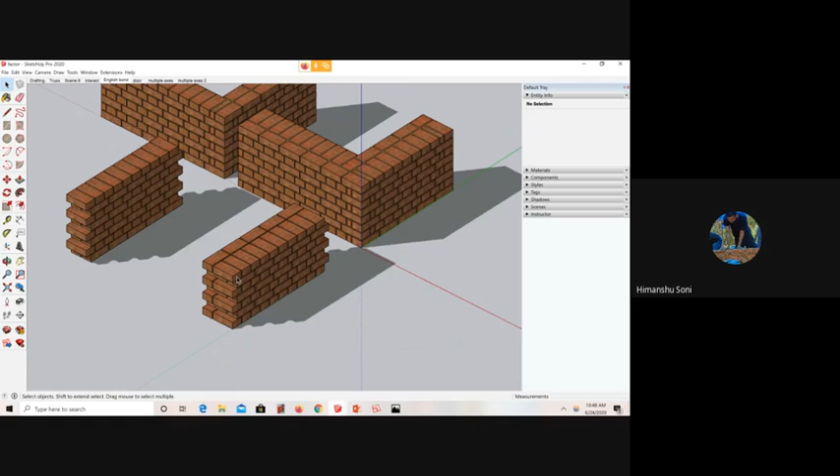So this is what I was talking about, exploded view. Once you have created simple blocks, either 1.5 brick masonry or 1 brick masonry, you can now go and show students: double click, go inside the component, double click back again, and let's say you have created this component and shift it to raise its height, and now you can show the two courses how they would function to your student.

Or there could be an alternate way in SketchUp. Let's say I go inside and copy these two layers and create an instance of it, and I just go inside. What happens is this is all same component, so if I edit one component, everything would edit, as I have told you earlier.

So there is a feature called make unique. If you go here, this is make unique. So if you have to edit just a single entity, you have to make it unique. I will make this course which is on top, or I will select with control all the bricks, and say make unique. Once that's done, I can now apply material to it.

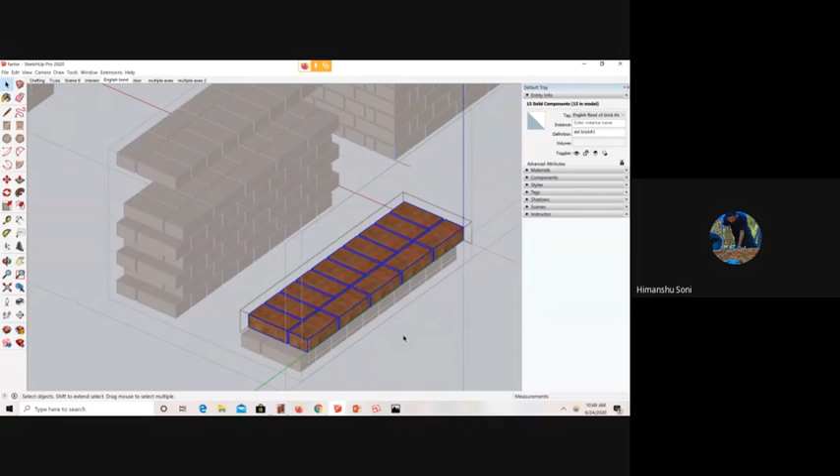Material is a very interesting tool also, which gives you almost rendered views at the time you are working. So this is your bucket, you can use the B command also, and I say I want to make it transparent to show the various courses.

So I will go to glass, this is your glass and mirrors, and I will select translucent material and start applying it to all the faces. See, once I change one, everything is changing here. And if I haven't made it unique, all the bricks would have become glass, so that is important for you to understand.

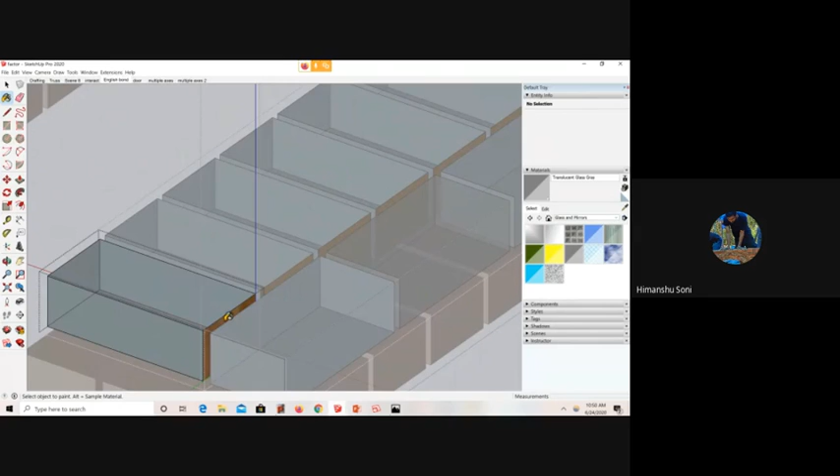And then I go inside and make all the faces... click outside, then it will be easily understandable. I'll just change the material. So this complete brick is made out of glass, and then you click outside and get out, and then you can show how one layer on top of other is happening.

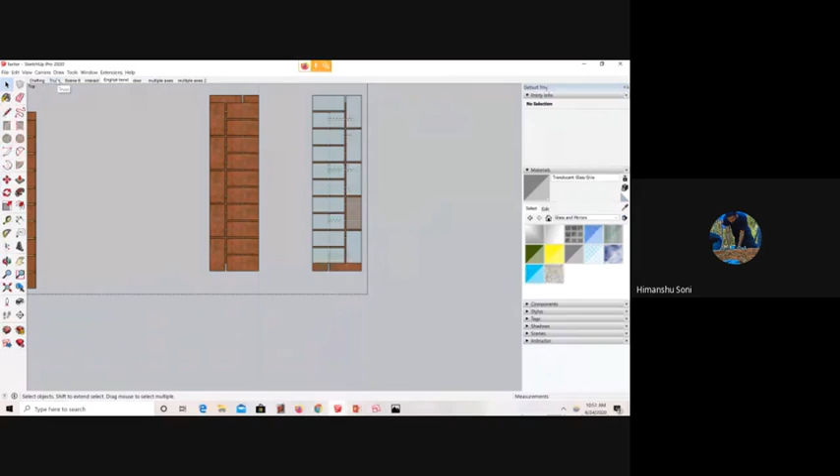There is another very interesting way you can do this similar thing. You press T to get the top view, or go to the camera standard view and click on top view, then you have a way of seeing the back edges. Press K and you start seeing the back edges, so you can see the different courses automatically. That is another way you can show the different courses to your students of masonry.

Because what Trimble is doing now, they are creating parallel softwares like Autodesk. So for MEP, they have created a different software, so they have functionalities accordingly. So for structure, I have to check whether they have created another software or not. But there is a possibility of doing it, the way they are advancing into technology in SketchUp.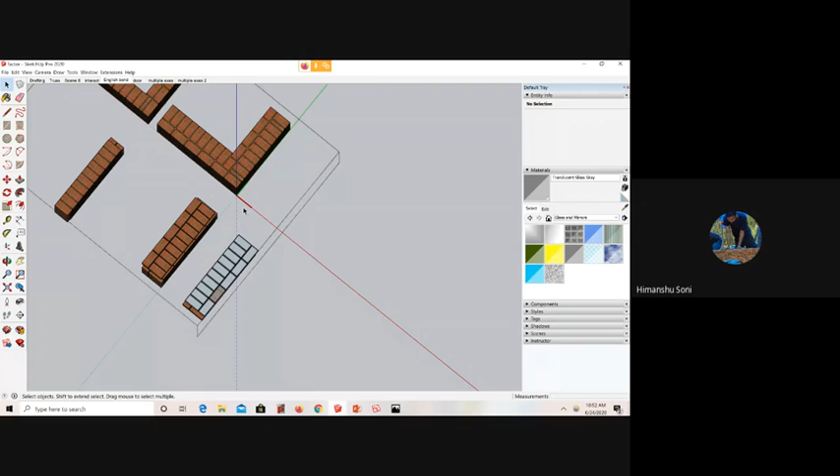Wow, so I never knew SketchUp can do so many things. I was just thinking if that's also possible. No, yes, it is completely possible.

So you have to first learn how to make a dynamic component. While making a dynamic component, it's like the ways we are demonstrating here on screen, this is only the faces that we are making, and we are attributing material to all the faces. But when you go into dynamic component, you are making the entire component as an entity, and you can give all the attributes like crushing strength, brick size, brick material, its properties, its rates, and everything, availability. So that becomes a dynamic component. We are at this level, but yes, there is a possibility of expansion in that.

So I will just come back to what we were doing. If you have to label, say for students you want to show what is what, so this is your queen closer, let's say.

Meenal was asking how do you make a dynamic component. I think Himanshu had shown this. Himanshu, would you just want to quickly go back to the dynamic component part? Yeah, I will just go back.

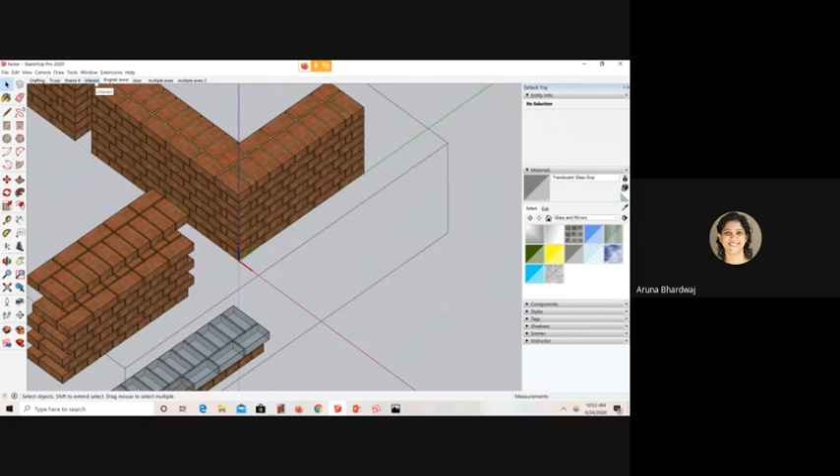What I will suggest is, creating a dynamic component from scratch in this session is a very lengthy process. So what you can do instead is go to the Window menu, then to the 3D Warehouse, and I'll show you how to search for dynamic components there.

Let's say you want this kind of door functionality. You press 'door' and search for it. In the advanced tab, you have to go down and switch on dynamic component. Now it will start showing you the dynamic components. You can download whichever is suitable for your explanation and start interacting with it. I'll go to Tools, then Interact, and click, and it will start interacting.

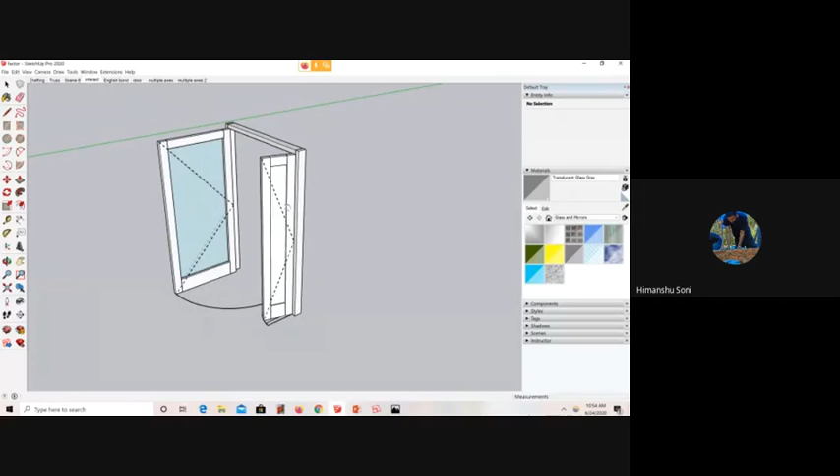Because I have a limitation of time, otherwise I would have gone into that thing also.

Essentially what we are trying to do here is explore and show that there are many softwares, and we can't go into all of them. SketchUp is something that is very easy to use, and actually there is so much that can be done. Himanshu was telling me about this, there are so many features. So I think as a teaching tool, this is a very valid software. We can explore ourselves, and then later on there are courses, Himanshu himself is running courses.

So what we can also do is, how much time do I have? I have 5 minutes, or do I have more time? You can take 5-10 minutes, our other speakers are already there, so it's not an issue. Okay, we can wrap it up slowly.

Okay, so let's say if you have to mention these various labelings, this is a very good tool. This text tool is also a dynamic kind of tool.

Let's say you create a surface and you want to find the area of it. You just click it and you get the area automatically. There are very good tools in SketchUp like this, you can mention and change the units accordingly. Similarly, you can click on the periphery and get the length of it.

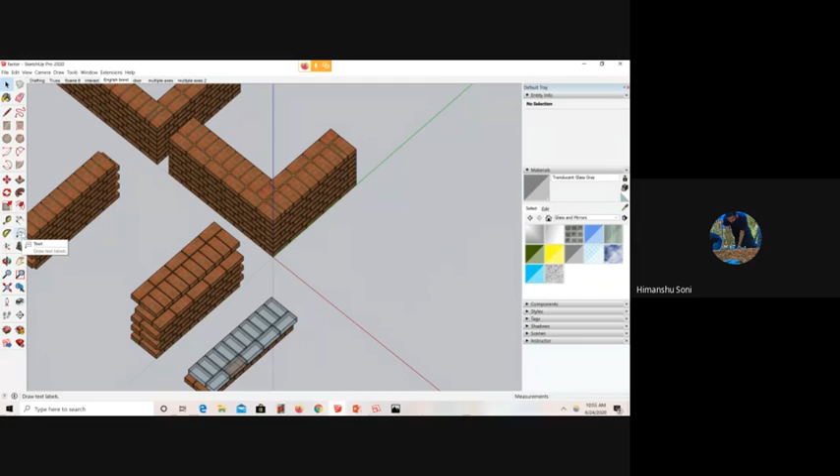In a similar manner, in this case you have to highlight your queen closer in your English bond, which is something that needs to be labeled. So you say 'queen closer' because it is nomenclatured as that.

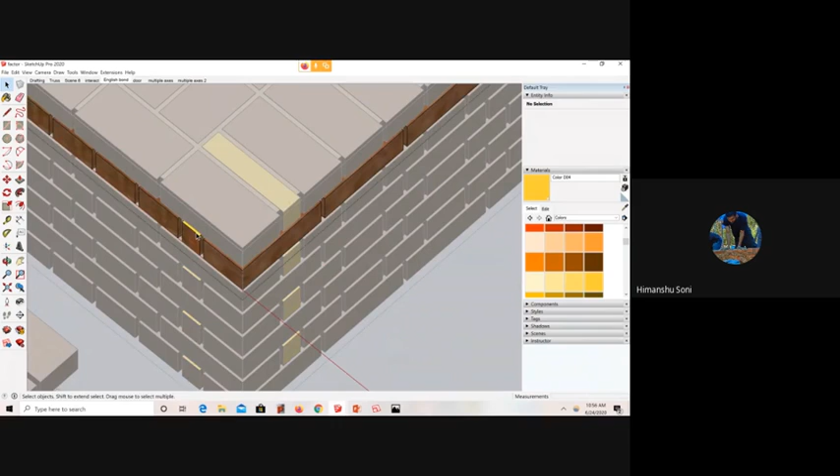This kind of labeling is also possible, and you can also highlight it. Let's say I go into this block and want to highlight just one block and show where it is all used. It's important to show all the places it is being used. I go to colors and pick a different kind of yellow, go inside this block, color it yellow, and once I get out of this component, I can show students where it is used - at the junction, at the end terminations, at various locations. In these ways you can very quickly highlight and show what is going on.

And when you do it dynamically, it makes more sense for understanding. So I think this is good for the basics part. I would also like to show something more detailed for the advanced users.

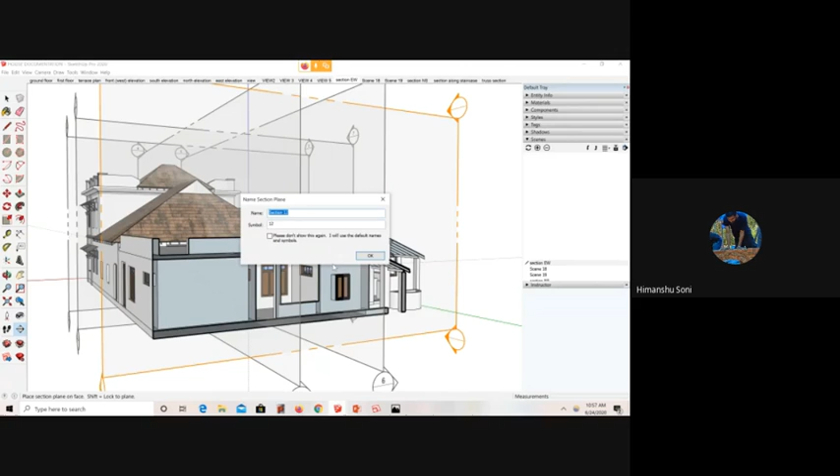Let's say you want to animate certain things in the sectional view, moving from one section to another - there is animation which always happens in SketchUp using the section tool. SketchUp has a limitation though: when you use this section tool and apply it onto the screen, it automatically closes all other sections. But there is a hack to it - you can have more than one section plane activated at a time. For that, you need to go inside the component.

So you have one section plane activated outside the component, and you go inside the component and put a section plane on top of it, say okay, then move and adjust your section wherever you want. You can have both sections running in both directions.

In a similar manner, you can have animated sections for explanation. Let's say you have this section and this section. I'll show you this animation - I can show how my building is happening at two levels at the same time, through various section planes which I activate in different scenes. Scenes are very important.

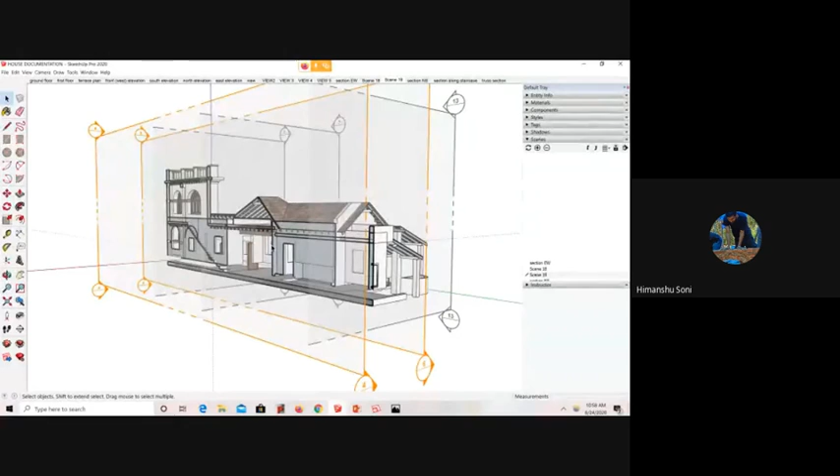When I turn on the section plane, I activated section plane 6 and 4 in different scenes. When 4 is activated, you are at the back side. In scene 19, it's the 6th plane activated - section cut 6. Let me go to view section plane so you can see: section plane 4 is activated, and 6 is activated in scene 19.

So with this tool, you can talk about construction details when you have to use it or when you're detailing out a building.

Okay, I forgot to tell a few things. I think I should wind up because it's already 11. You can use these kinds of drawings which you create to actually communicate very well also at site.

There is a SketchUp extension, or SketchUp software, called SketchUp Viewer, which can be downloaded on mobiles. You can carry your models to site, or give it to your skilled layman or your client to keep interacting with the model, so they can understand whatever is happening on site, is it going as per the vision of the designer.

A second tool which is very interesting - if you're on the move and you have the SketchUp file on your email ID and want to use it, there's SketchUp for web also, as an application which opens up in your browser. You can download the file and open it here.

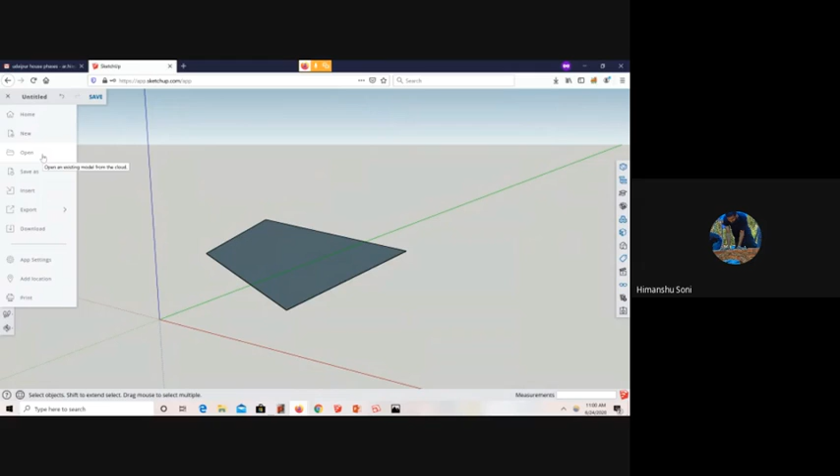So when you go to open, you download any SKP file from your mail ID and you can open it. If you're not carrying your laptop or you're not near your PC, you can use this to access your SketchUp file.

So this all makes it very handy to use such software. You can access things anywhere, interact, show - like we have grid plans to tell people on site, okay, this is the grid. Similarly, you can send SketchUp models and interact and communicate on call what you want.

There are a lot of things to tell, but I think I'll just take one more thing for the mid-level users, which is your scale tool. Multiple axes I wanted to cover, but time is not allowing. Just one last thing - coming back to your trusses.

Let's say I have to make this truss. I align its axes. Now, the tape tool is generally used to do measurements - most users use it just for measuring. But there is a very good use of the tape tool.

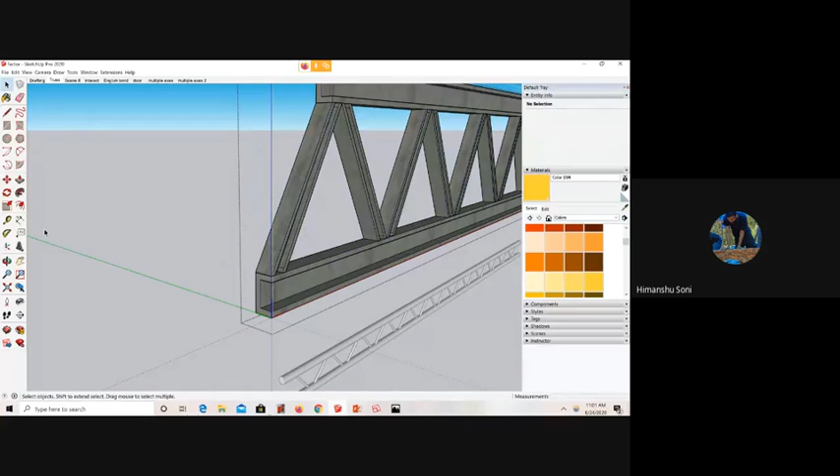What you can do is go inside the component, use the tape tool - this is, I think, 50 mm. So it is 50mm, but I want this to be a random dimension, so I can't scale it by 1.3 or some multiple I don't know. I want it to be 61 mm, so you simply type 61mm and this will scale to 61mm.

Now when I type it, it automatically scales - okay, something wrong happened, let me check. So you go to the tape tool, do this measurement, and say 61mm, and it asks: do you want to resize the active group or component? You say yes, and it's automatically resized. Now when you measure, you can see it is 61mm.

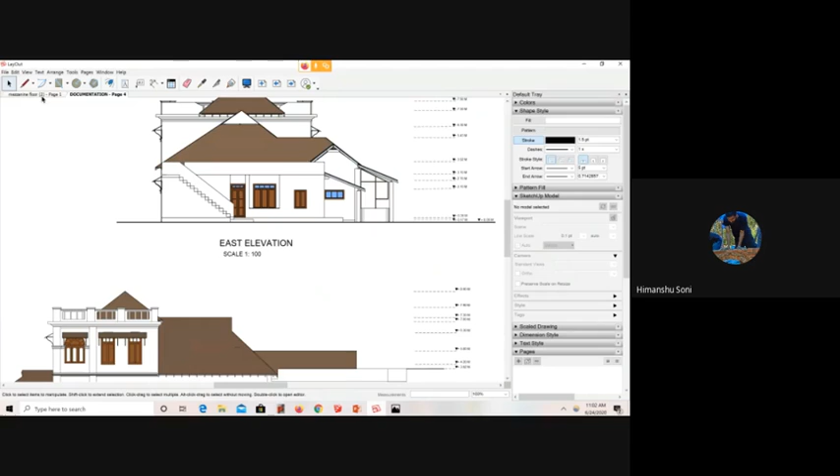So these are a few interesting tools in SketchUp which make your life easier while drawing 3D objects, and you can use advanced tools to communicate more well. You can create very detailed drawings, like I've discussed, from simple furniture to various elements. I think this is enough.

In the end, I would say just stick with one software for a longer time to actually understand its hidden features, and you would be able to create everything you want to.

While teaching, as a hack, there's a lot already available in the Warehouse. We can dismantle the entire thing and then demonstrate using just the Move tool and copy and multiply tools to array, to show students how it's done on site rather than actually drafting in front of them. Everything is already available, or we can make those components and keep them aside for lectures, because students' attention span isn't enough for them to wait while you make a circle and extrude it into a tube. It's good to have it handy so we can assemble in front of them, and they can see the 360-degree view of everything, which keeps them interested.